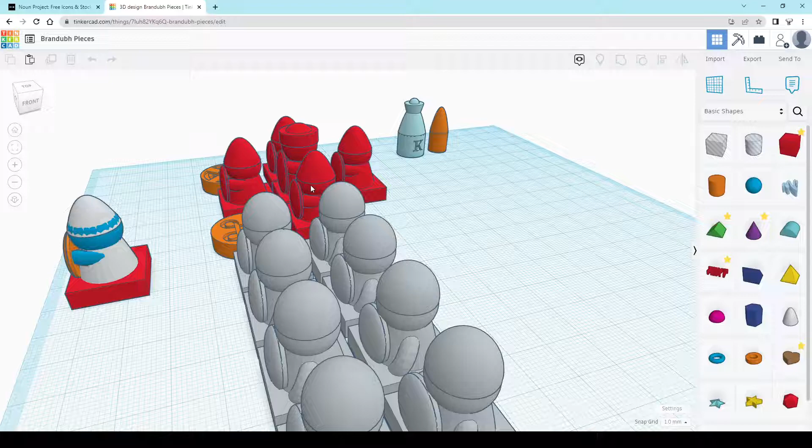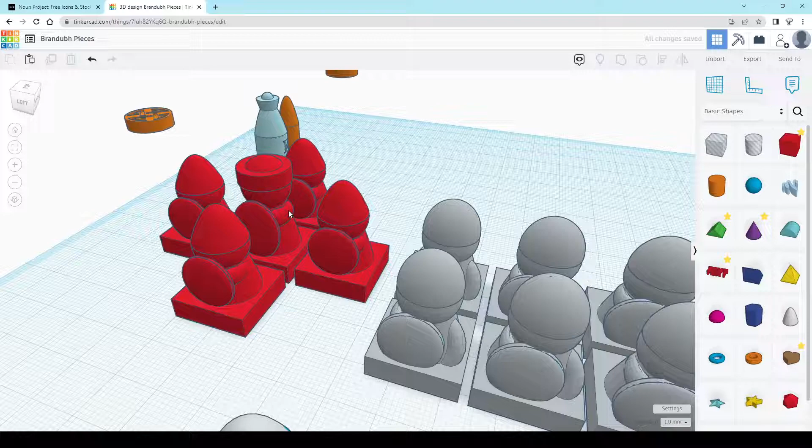As you can see, I've already made some pieces earlier. There are two teams: the attackers, 8 of them, and 4 defenders plus a king. These are my two teams. The king has a crown, and I've made the attackers and defenders have slightly different shaped helmets to differentiate them. I'm going to show you how to make one of these character pieces first, then the simpler flat pieces later.

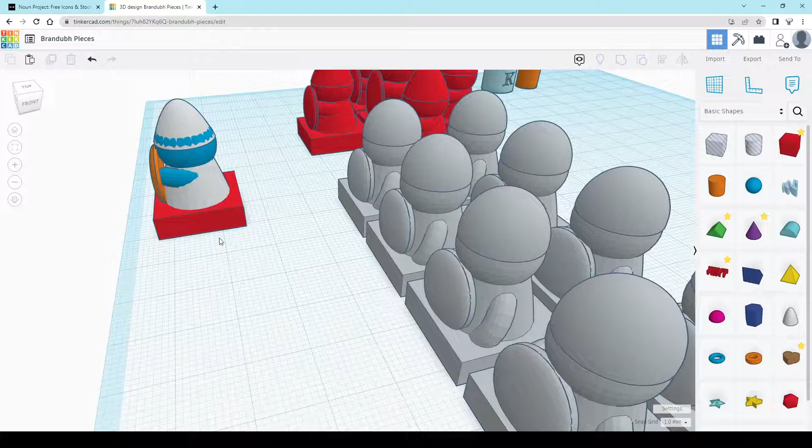So down here I have one that I've put into its constituent parts. Basically you've got a base, a sort of plinth, which is made from a cube.

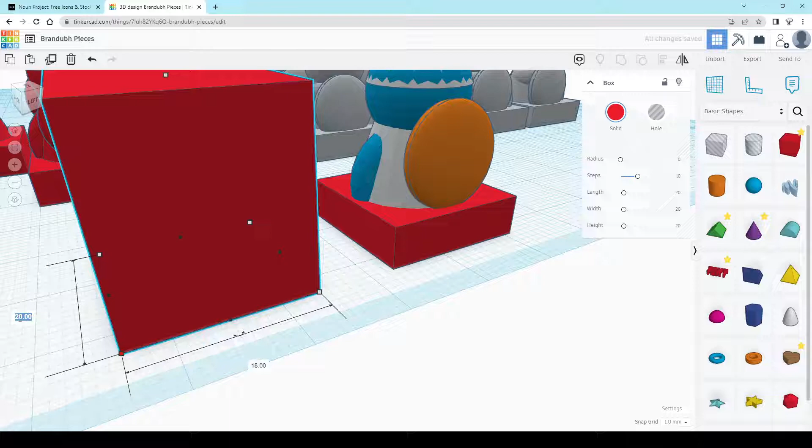Let's make another one next to it. I'm selecting cube. Depending on the size of your board, you can make the pieces however big you want, but the board I've been using for this latest project has 20 millimeter squares, so I've gone for 18 millimeters for the total width and length. 19 would be fine, as would a smaller piece.

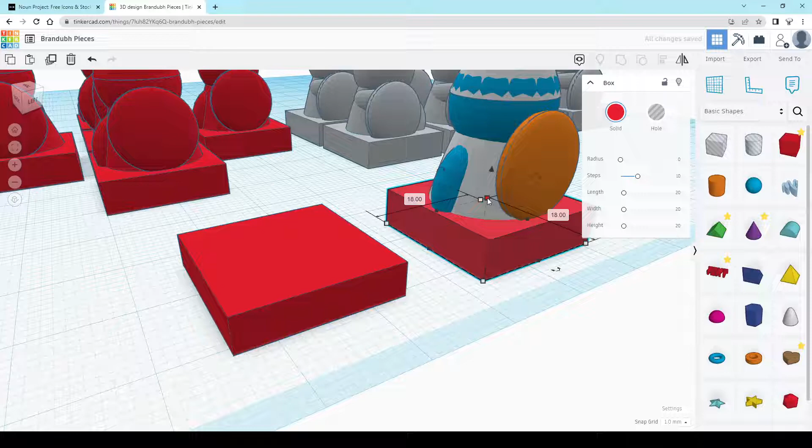For height, you can do whatever you want. I'm going to go for about 4 millimeters, although actually it looks like on this one it's 5, but it doesn't really matter. So that's step 1 - I resized it using this button here.

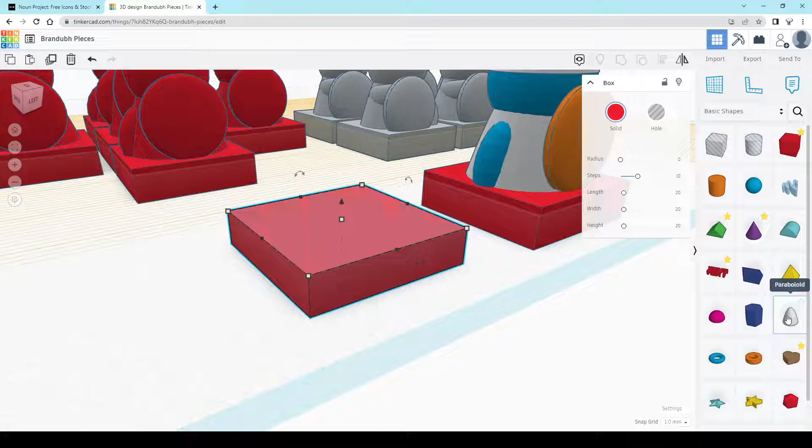Now I'm going to put on the body of the character. I'll click on the work plane tool and add it to this top surface, since that's the surface I'm working on. The shape I used was down here, called the paraboloid, so I'm going to click that. Because I put the work plane on top of the piece, it's already in position.

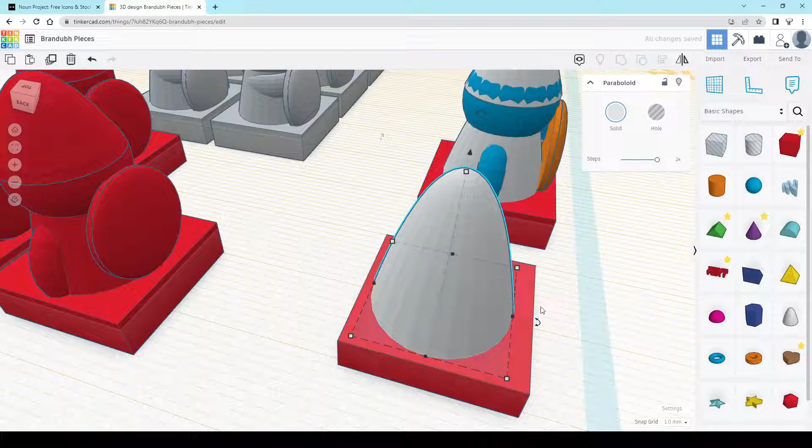I'm holding down Shift and Alt at the same time to resize, and I'm going to center that - although it already looks quite centered. In fact, I might make it slightly thinner on both sides, because I've got to fit a shield on one of the sides here. So it's not going to be exactly the same as my other one, because it doesn't need to be. I'm just going to align it on this axis, but not the side one.

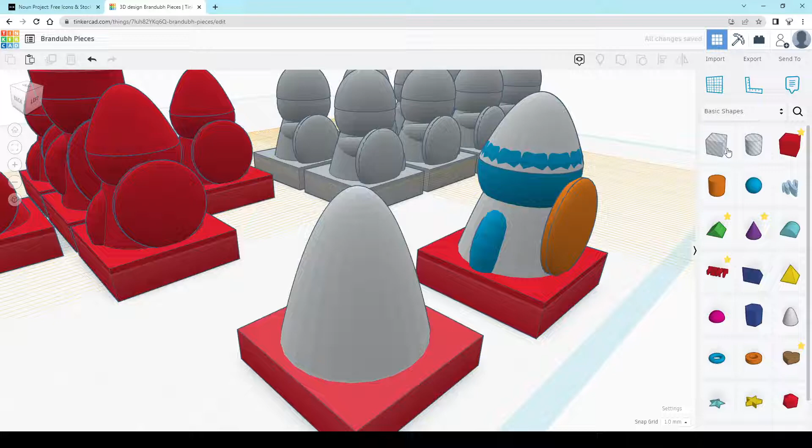Second step is to put on the head. I'm not going to put the work plane here, because it goes all weird angles. So I'll just put the work plane on top of the piece, like the base, like we did last time, and then make the head a suitable size. You can do this by eye really.

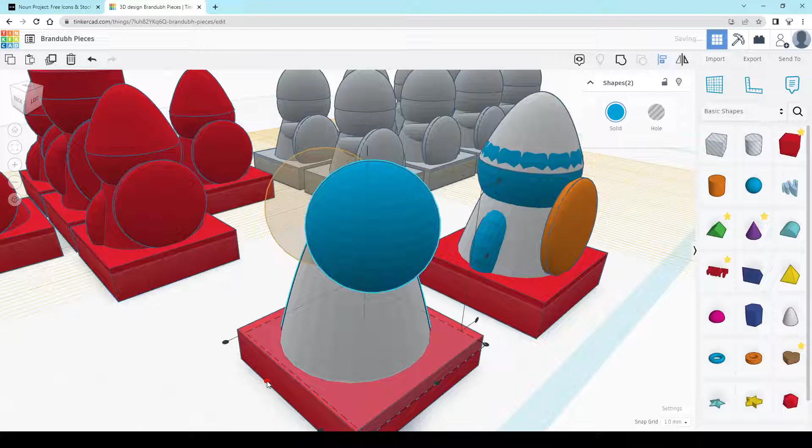Click on the cone to raise it up, and I might center that on the body. So with the head selected, hold down Shift, select the body, press align - and I don't want the body to move, so I click on the body, which narrows down the alignment options for the head. That aligns it in that axis, that aligns it in that axis, and now it's nicely in the middle. It's a bit taller than my other one, that's fine. You can fiddle around and make it the size you want, but I'm happy with that.

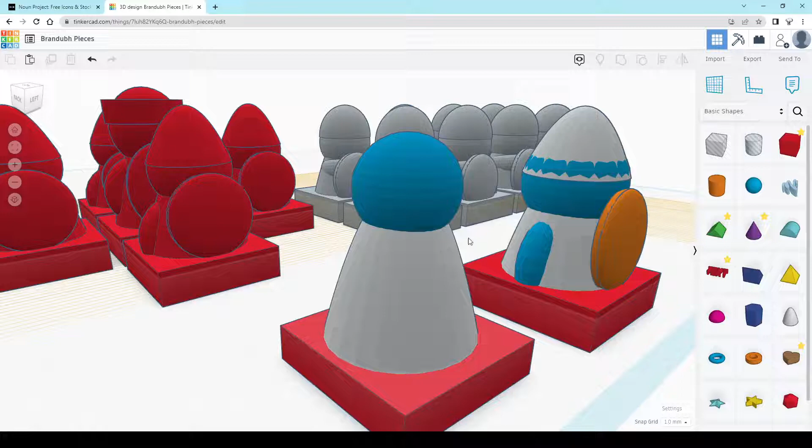Now it's time - you can do it in whatever order you want - but I'm going to do a helmet. I actually slightly prefer the dome helmets; these ones look a bit eggy. So let's do pretty much the same as we did with the head. The work plane is still on that base, so I'll leave it there. Choose the dome, and I'm going to try and match it pretty much with the size of this, which is 10 by 10 at the moment.

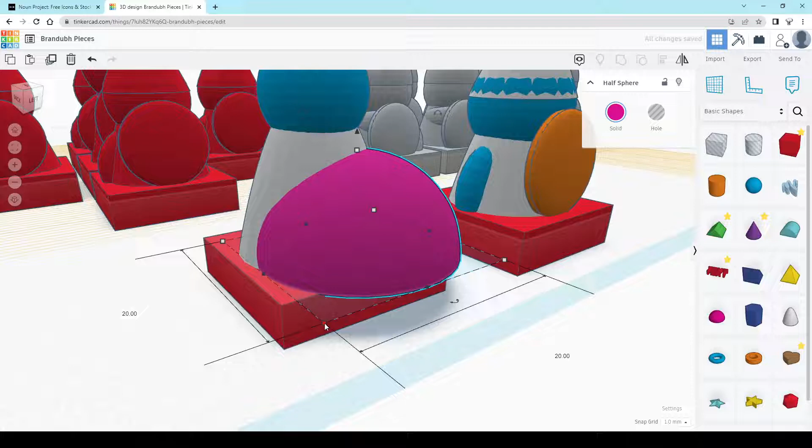So let's resize this dome to be 10 by 10, of course 10 millimeters being 1 centimeter. There it is, and we're going to raise it up to get it in a suitable position.

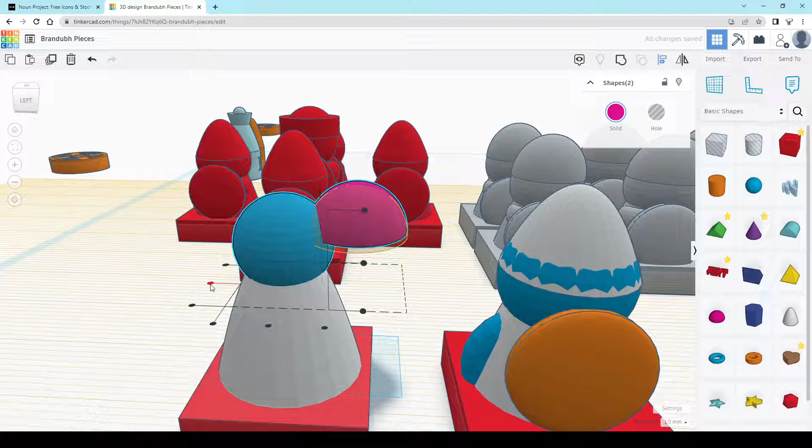I'm using the cone again, and I'm going to align that with the head. I'll hold down Shift to select the head as well for the align tool. I don't want the head to move though, so I'll click on the head, which narrows down the options. Oh look at that, that was a good guess.

That's almost exactly right. Now I'm going to make the helmet dome a little bit more pointy so it looks more like a helmet. That's pretty good. You don't want a large overhang here, no more than 1 millimeter, because you'll start to have problems with the printer.

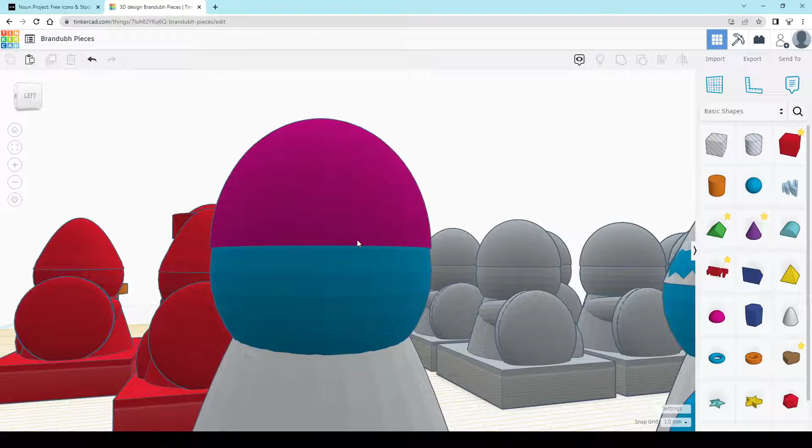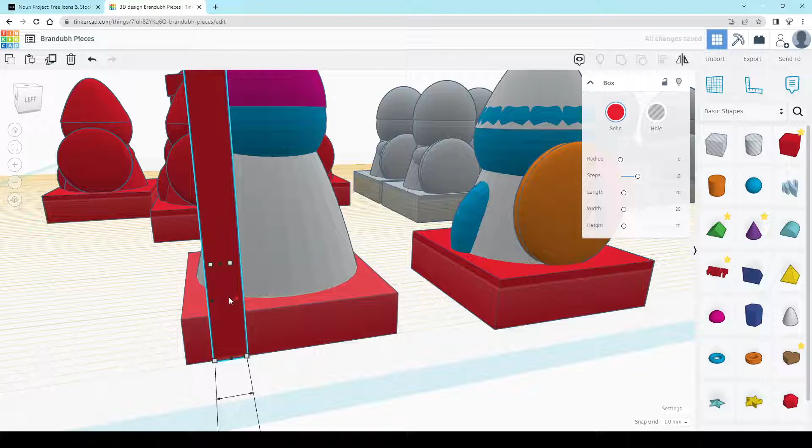Some of my pupils made these little bits coming down, so I'll show you a little bit - I guess you call them nose protectors. They did something like this, and it looked really effective, so I'm going to show you how to do it here. Let's narrow that down to a more sensible size, just a little piece like this.

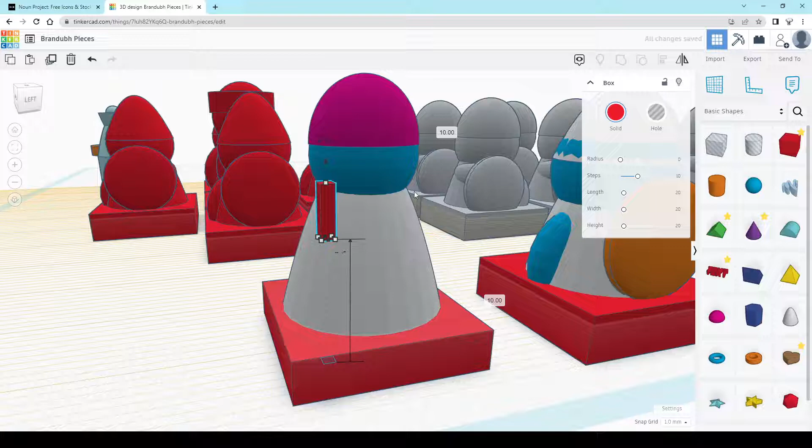I might put the work plane on this side actually, on the side of the plinth, which makes it a bit more intuitive to work with. I'm going to use the keys, and then the cone - can't tell, but it is actually the cone there. Going to push it forward. It needs to come up a bit, doesn't it? I'm using the arrow keys on the keyboard to do it.

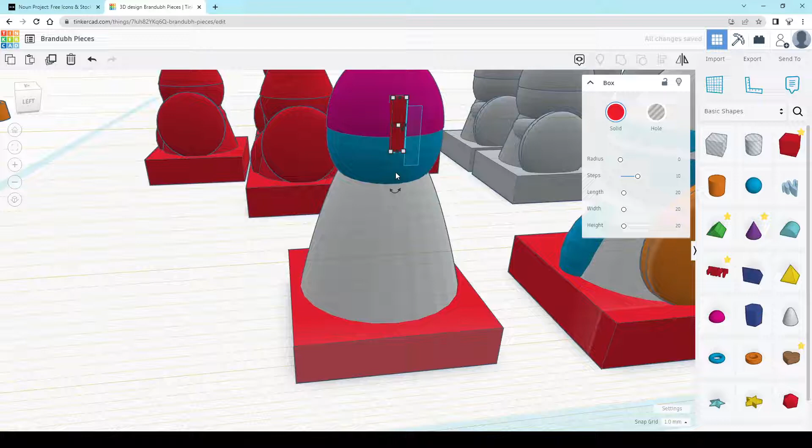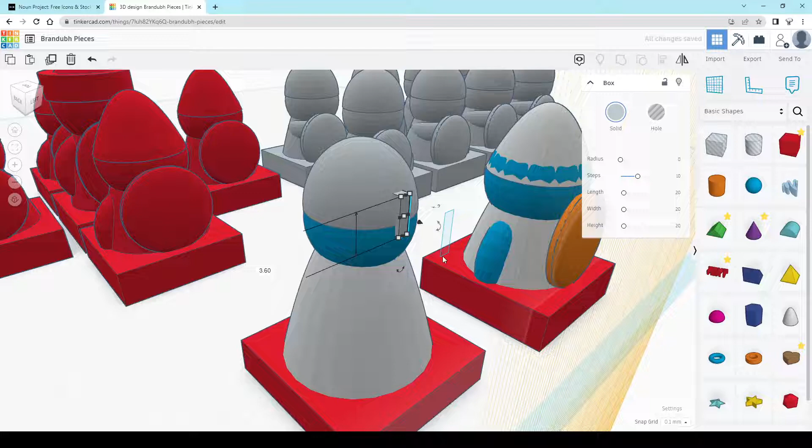Then we can push that in a little bit more. Can you see it's snapping? It's moving in quite far there, so I'm going to change the snap grid to 0.1 millimeters to make it a bit more precise. Then I might make it a bit shorter, and you could actually rotate it slightly on this axis, so it looks like this. Yeah, definitely, I like that. It kind of looks pretty authentic.

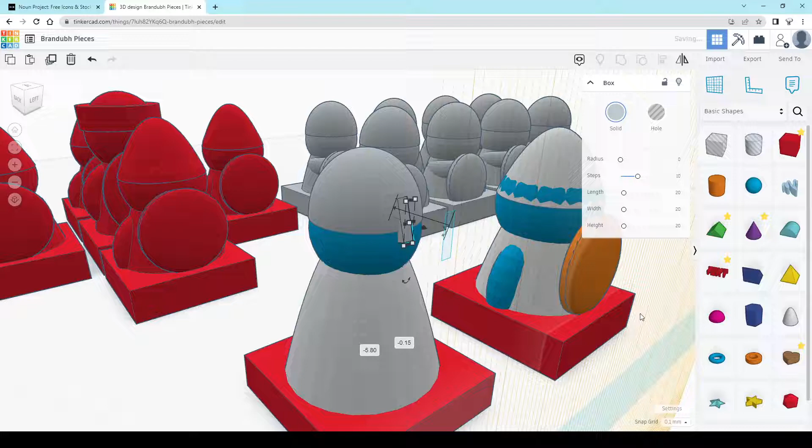So that's a chin guard - or no, chin guard? What am I talking about - nose guard, for my Viking defender. That was that. You don't have to do that obviously, that's just a little optional extra.

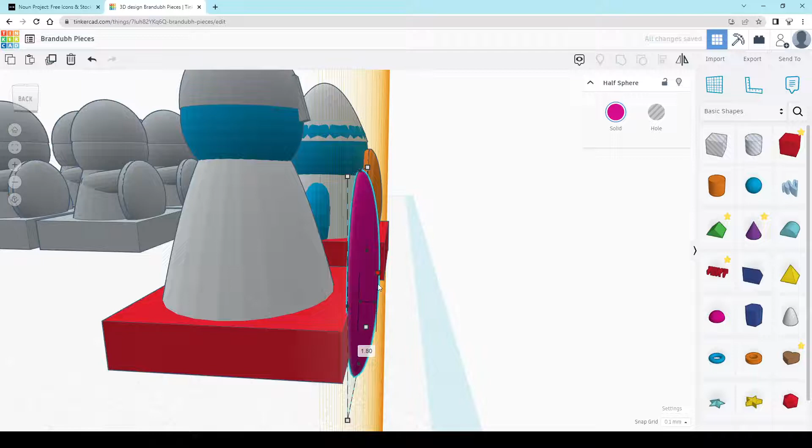Now we're going to do the shield, which you'll be pleased to know is quite simple. It's just that dome again, and we'll flatten it. Not too thin - we don't want it to be paper thin, because then it won't print, bearing in mind these are really small pieces. I think it needs to be a little bit smaller than that, so I'm going to hold down shift as I resize it to keep it in proportion.

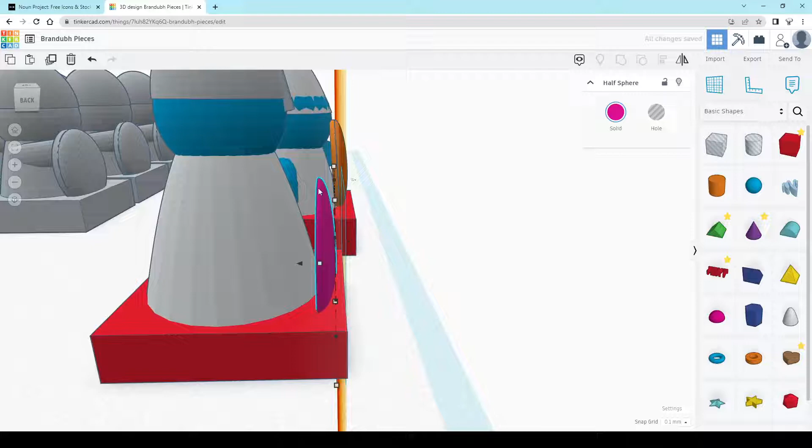Let's push this in here. Now we want to avoid it being floating in midair, so just - well, that's a bit still too big isn't it? Vikings tended to use round shields I believe, so that's what I'm going to stick with here. I'm going to keep it as authentic as possible, like that.

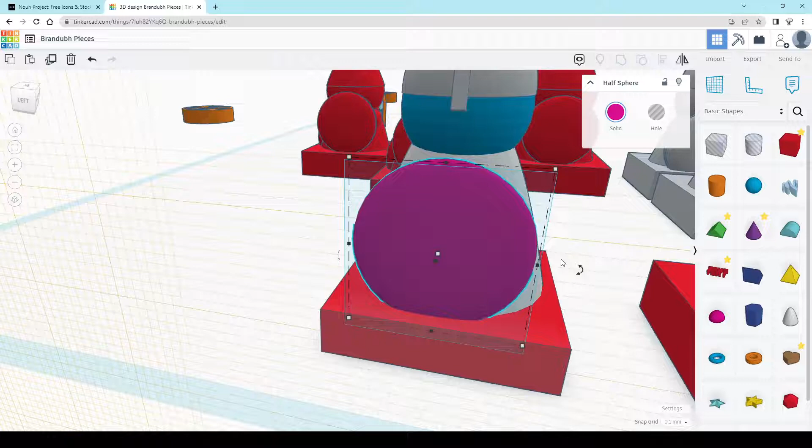And we could centre it, but actually it doesn't have to be centred. It might look kind of more artistic if it's slightly off to one side, because in reality Vikings wouldn't be completely dead in the middle with the shield - that's pretty good.

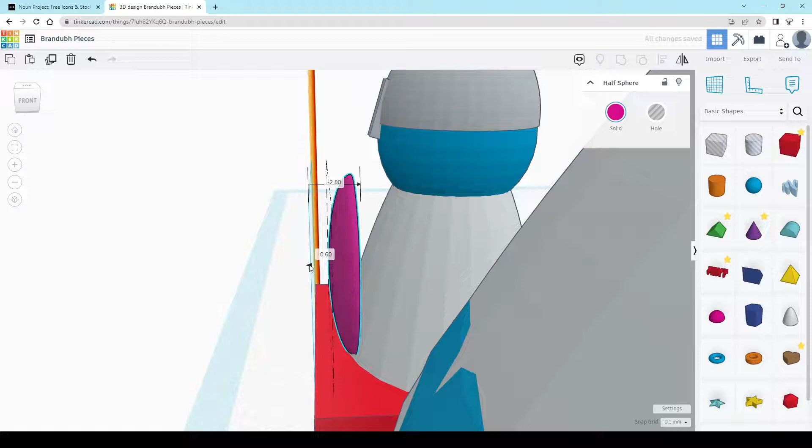Let's check the thickness of that. Okay, so that's still a bit thin for my liking. It might look realistic, but for the purposes we want it to be nice and strong, and there needs to be good contact between that and the rest of the model. So yeah, that's better, I'm happy with that - we certainly don't want it floating in midair.

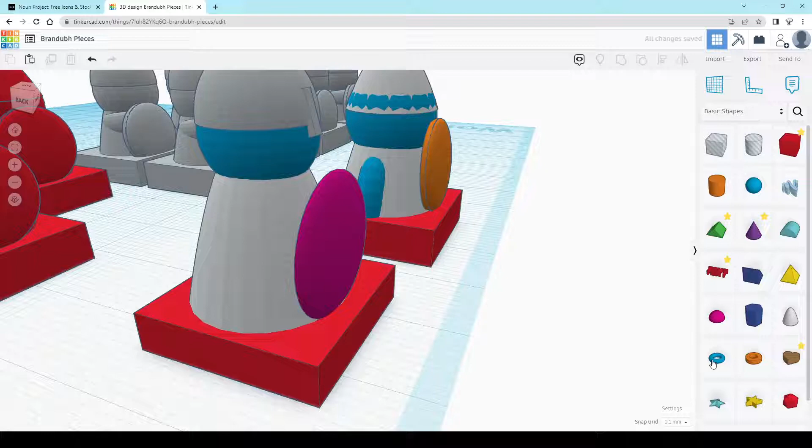And then I'm going to do the arms. I might put the work plane back to normal for now. For the arms, I just used a shape called a torus, which is this one here, and you have to do some bits of flipping on it first of all. So first thing, I'm going to flip it so it's upright using the flip tool, and then we need to shrink it - I'm going to hold down shift and shrink it to get it roughly the right size.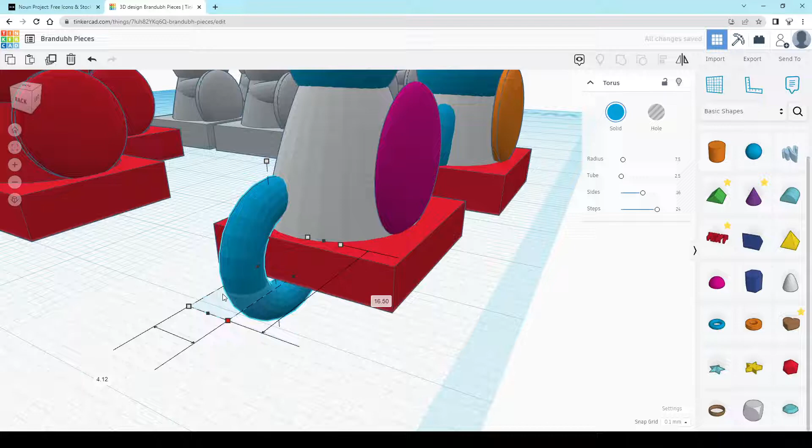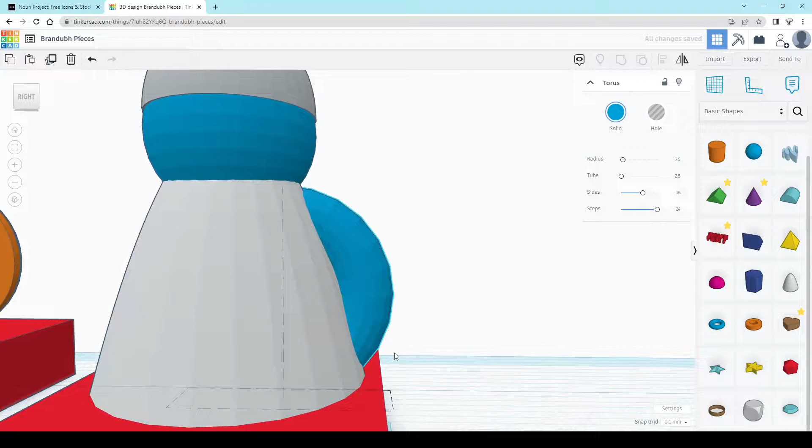And then I'm going to position it so that it looks like an arm. Looks a bit more like a teapot handle there, so that's not quite right. I'm actually using the keys to do this. Oh, that's pretty good, I quite like that actually - that looks quite authentic. Bit of a relaxed sort of looking arm, but it's fine.

Now, I've got to bear in mind that the squares on my board are 25mm, so it could stick out a tiny bit, but let's just, to be extra safe, push it so it's pretty much in line.

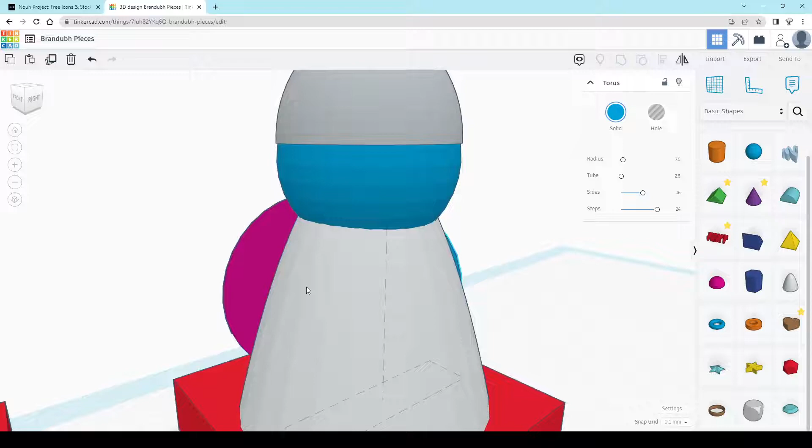I'm not sure if in real life they would hold the shield with the left hand if they were right-handed, since their right hand would be wielding a sword. I'm not going to do a sword on this character, so let's just have the left hand wielding the shield.

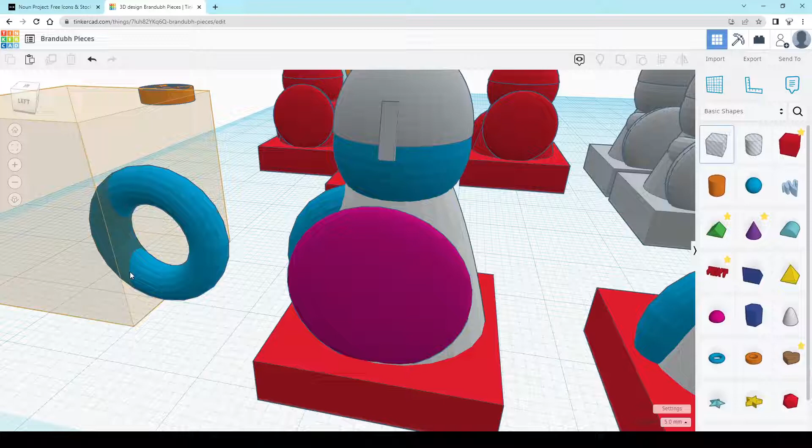Now, what I did for the left hand was use the same torus, but it's probably easier if I show you a bit over this way. I cut some of it off, so I basically got a cube hole and did something like this.

If I move it, it's on the 5mm snap grid, which will work. Let's turn that back to 1. Something like that. Okay, yeah.

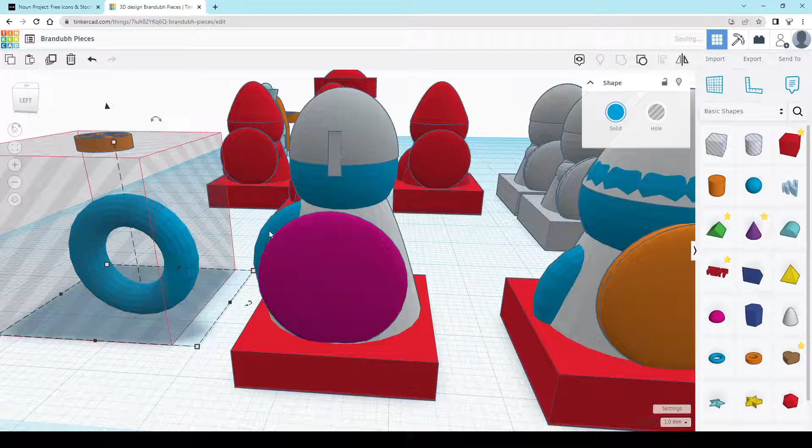Now I'm going to group that together, those two pieces, combining the hole and the torus to make an arm type shape. I'm going to move that over through the body, and then I rotated it using this, rotating it to be precise, doing it from above.

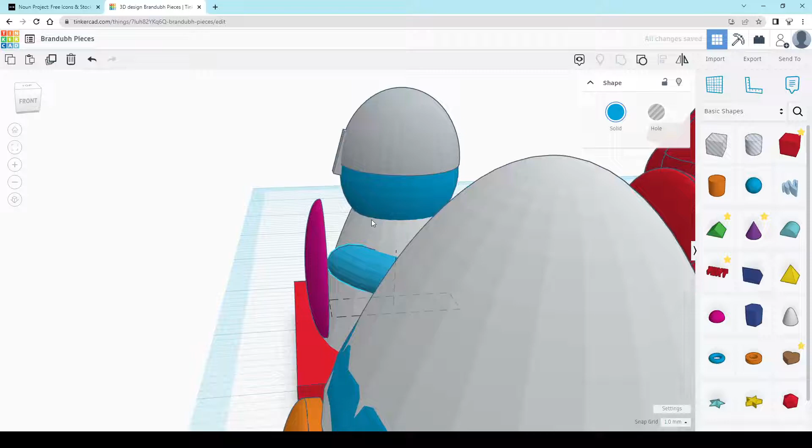Now what I did, I put it going up at a bit of an angle just to make doubly sure it would print correctly. Technically this is an overhang, but because these pieces are so small, it will manage it. Just tipping it up slightly like this makes it print a bit better.

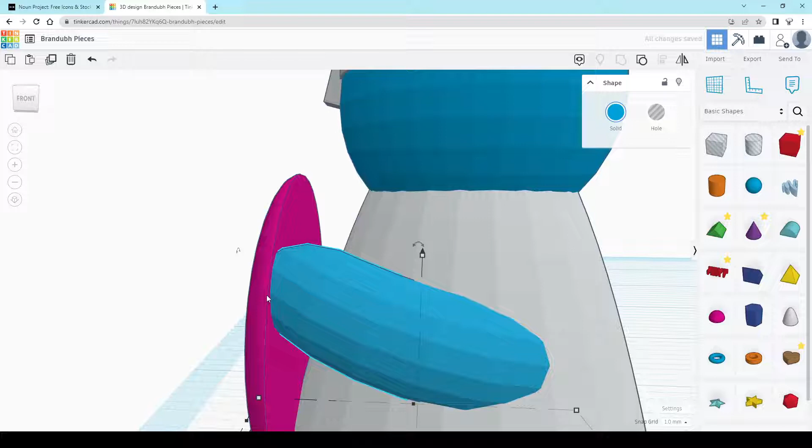Also, you don't want the hand sticking through the shield. And having the arm going into the shield is going to strengthen that shield and make it less likely to snap off. It gives it a bit more strength.

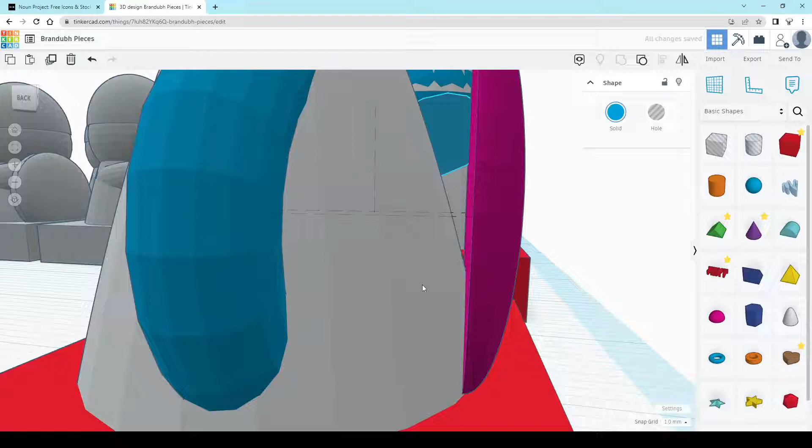So yeah, I'm happy with that. Let's check the height comparison. That arm shoulder does start a bit higher, so we could raise this a little bit. Not too high, obviously. In reality, I think the shield straps would be a bit lower down, but it doesn't really matter. We could move that in a tiny bit more.

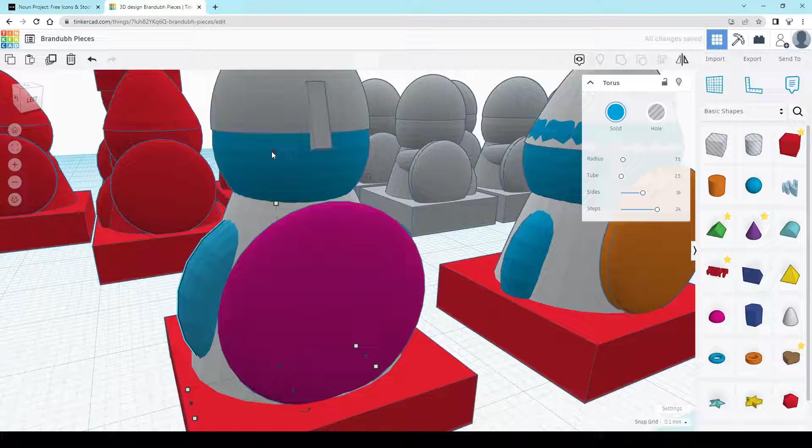And maybe down a touch. I don't want it poking out the other side though. Just to get it matching a little bit on the other one. Yeah, you can see there actually it's not going over this. No, I quite like that. I'm quite happy with that.

Good, and that is how you make one of the soldiers. I would join it all together now, group it, and do it from above so I don't accidentally group some of the other pieces.

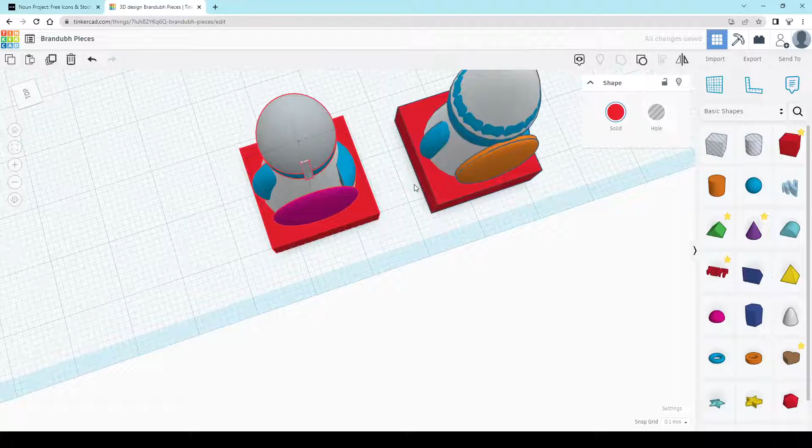And it's thinking about it. Tinkercad's been a bit slow today. I think there's lots of people using the program, so it takes a while to group together. There we go, that is done.

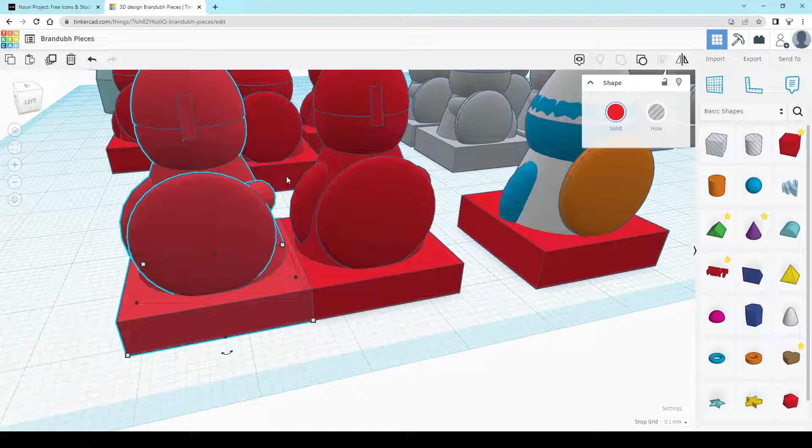Now, obviously, if that was your King's team, you would duplicate another 3 of them, and to turn them into the other soldiers on the other side, you can either just print them in different colours, or what I would do is slightly customise them. So maybe change the heights slightly, maybe make one of them a bit thinner. You could actually give the attacking ones a spear, but it would have to be quite thick.

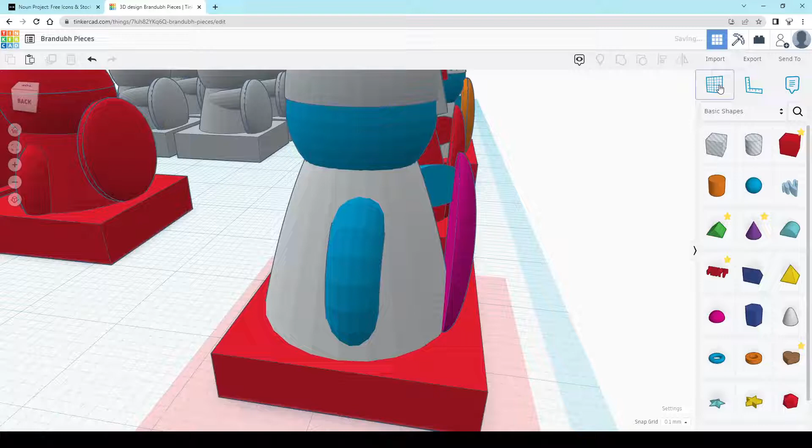So if I was going to add a spear, I would use a cube again. There's not a cube I can recycle, so I'm just going to have to get a new one. It's far too big, so I'll just make it quite chunky, and I'll have it just literally next to the body.

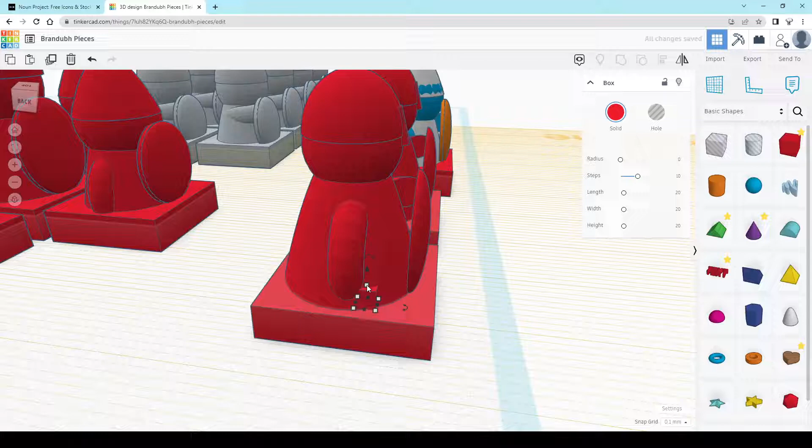2mm, let's see how that looks. Gonna bring that up. Yeah, that's not too bad. It's thicker than obviously it would be in real life, but we want this to be fairly sturdy.

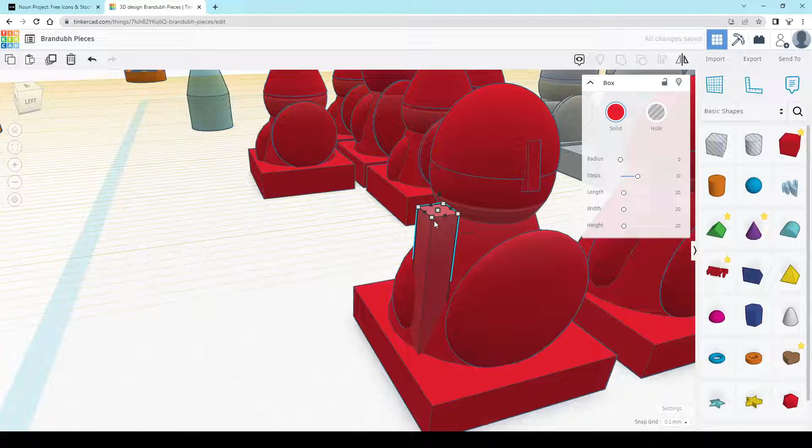And to put the tip on the spear, I would use this roof pattern. So I'm actually going to put the work plane on top of the spear, because that's the thing I'm working on. Let's look at the dimensions, so it's 2.2 by 2.2.

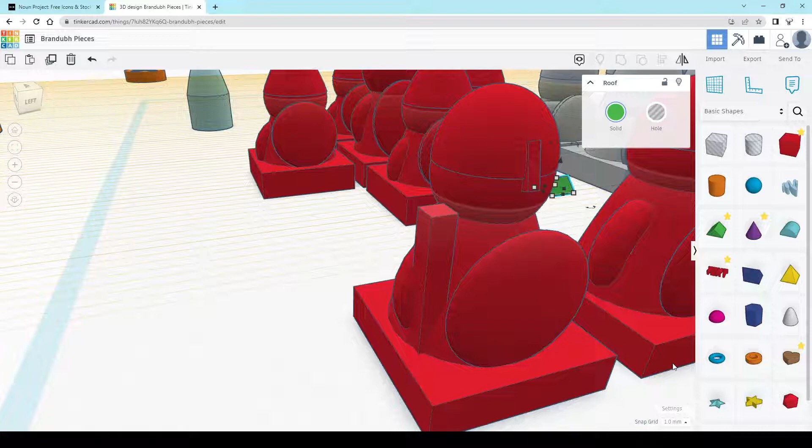So we're going to make our roof shape the same. If I hold down shift when I do this, it should let me do 2.2 both at the same time. Oh, is he gone? Miles away. Let's put the snap grid up to 1mm, using the keys here. I do use the keys quite a lot. Okay, I'm going to make it a bit more pointy.

That's looking pretty good, I like that. I'm going to just align it. Is that 2.2? That's 2.2. Let's align it, so select those two things. That's selected, hold down shift, select sphere, align - don't want the spear to move so I click on that. Align there, align there. Job's done.

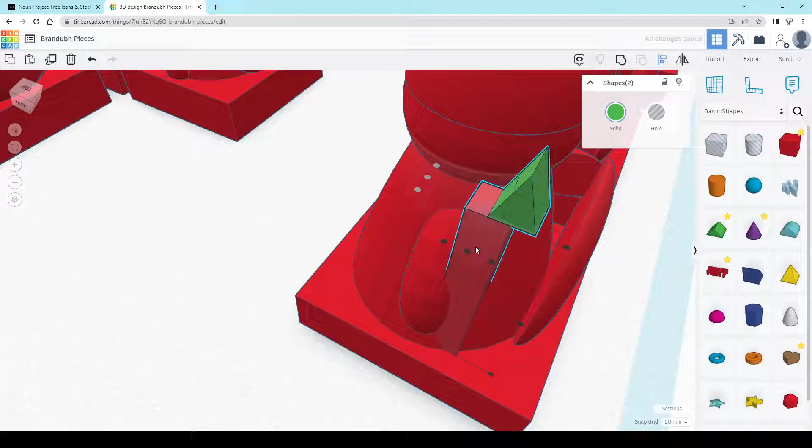You can combine those two together like that, and you've got a spear. And then obviously you combine that with the shape as well. So yeah, nice chunky spear there.

You could probably get away with it being a tiny bit thinner, but that's fine for now. So that's what you do.

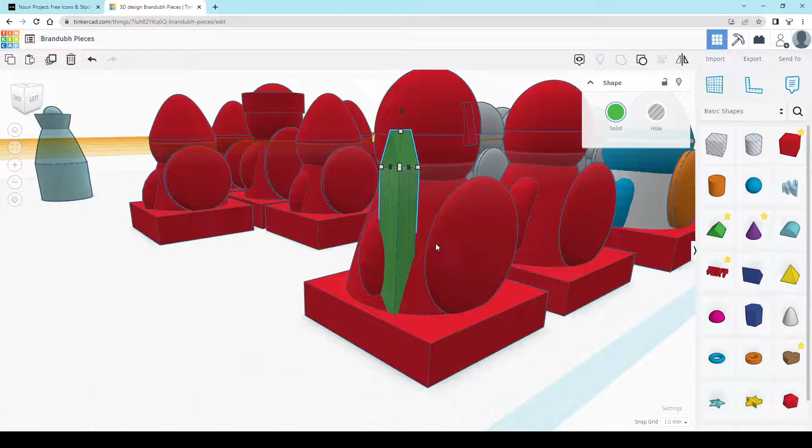And then for the king, I would just put - you could make it a bit taller and put on a crown. So let's duplicate it again. You can see how often I just duplicate things. You really want to make this as easy as possible. And I would ungroup it.

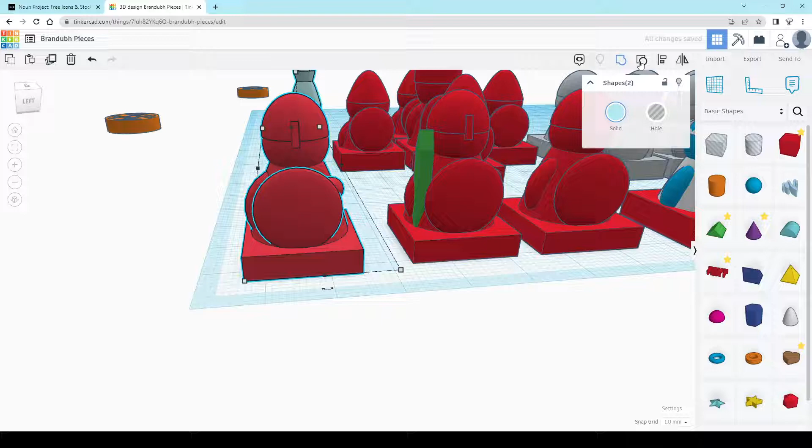We want it to be really obvious who your king is, so we're going to make him a bit taller. Let's ungroup all of that. Let's put the work plane back to normal. Ungroup it, and we're going to give him a crown instead of a helmet.

And we're going to change the shape of the shield slightly. In reality, he probably would have had a circle shaped shield.

Let's put a crown. Let's make - move the head up a bit. Because back in the olden days, kings really would have been the strongest warriors. It wasn't - well, I meant to actually enlarge that, so let's put it up. If you weren't a strong warrior, physically strong fighter, you wouldn't be a king in the Viking Age.

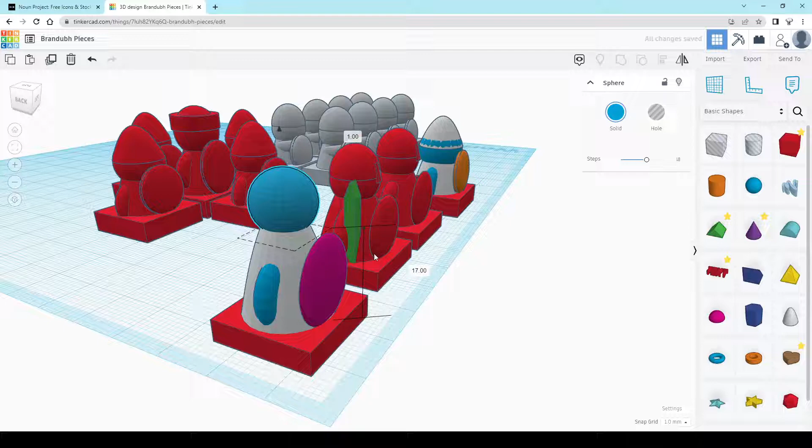It's quite often, if another person wanted to take your throne, they would challenge you to a fight, and you'd have to do it, or you would lose your position. So there's my king.

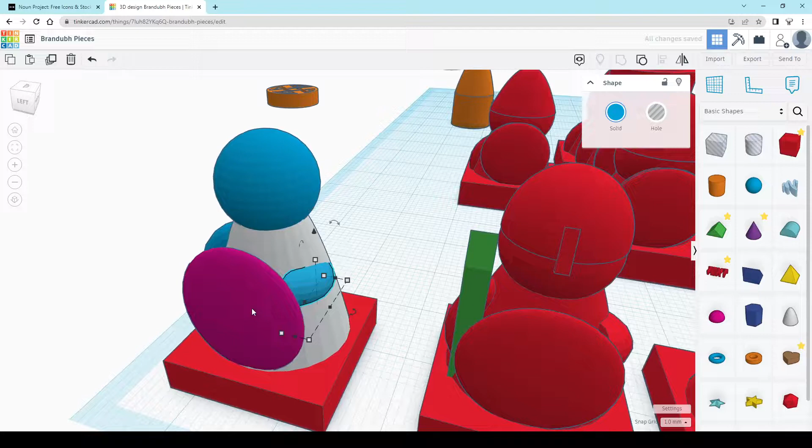I'm just going to move the shield over a little bit, like that. And let's put a crown on his head - could be a queen as well if you wanted. Let's put work plane there, and I'm going to use a ring.

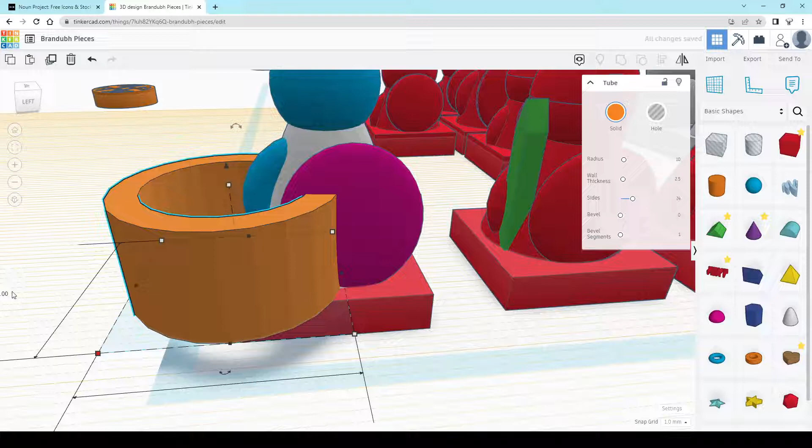The head was 10, wasn't it? So I reckon if we go for 11, because we could get away with a 1mm sort of overhang quite easily. Let's use this, I'm going to align that with the head.

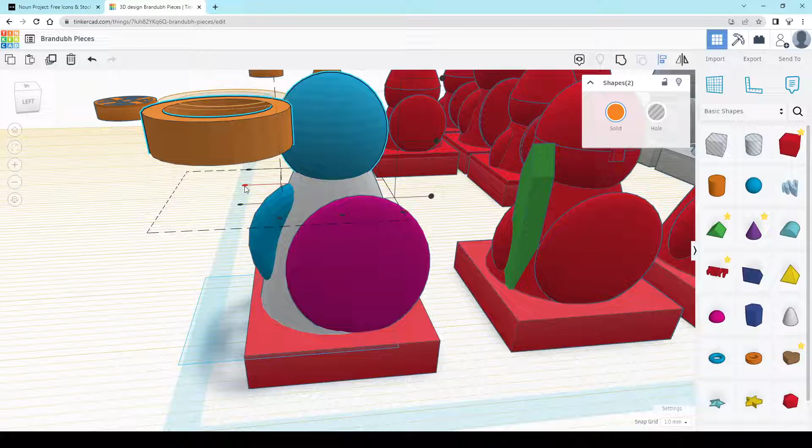So shift, select, align, click on the head because you don't want the head to move, and we can preview it. I'm doing it - I've done that correctly. Yep, there and there, not a bad guess. Something's a bit squiffy here though, isn't it?

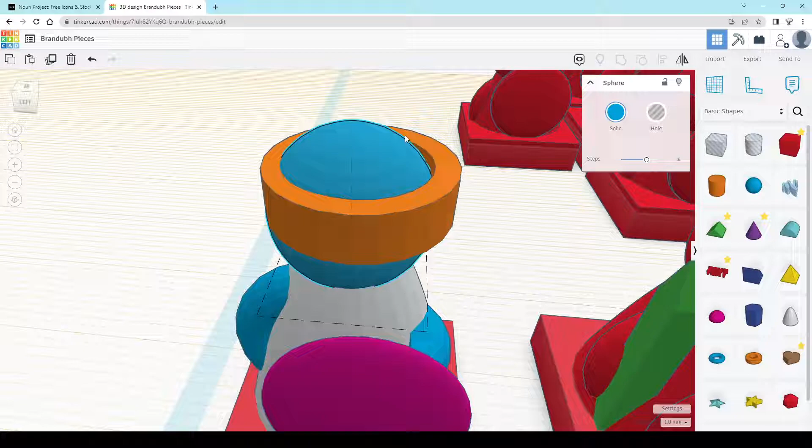What's going on with the size? 11 by 11, the head is 10 by 10. Why is that slightly - seems to be not quite centered. Not quite sure why that is. Let's figure it out.

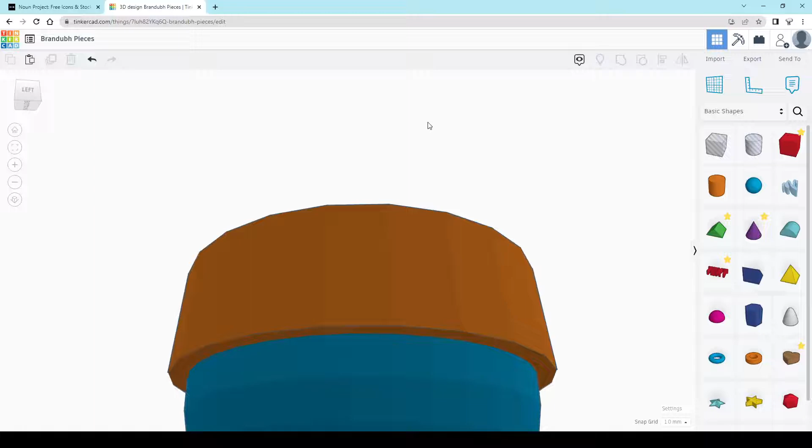Okay, let's try again. So let's align it just to the head, click on the head. Oh, maybe I just didn't click on it correctly. Okay, now we need to make sure it's attached and not floating in midair. Nope, that's good, and I reckon that will be fine.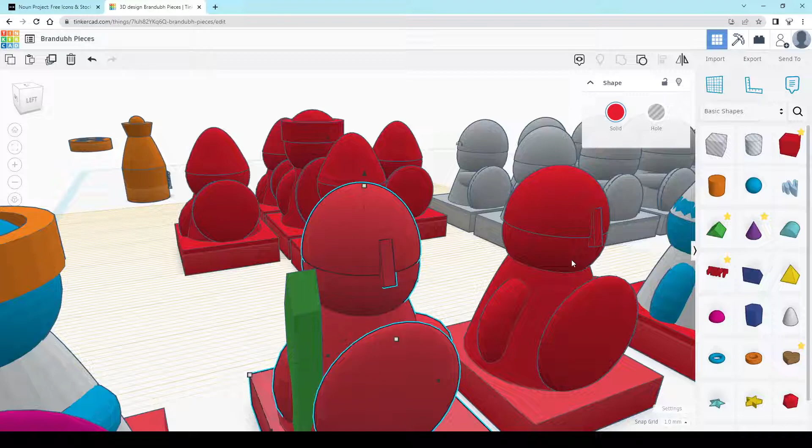There's a bit of his head poking out on top. One or two people I have seen do this - they have actually made a little upright bit here, like a metal thing, which you could do in a similar way to this. You could recycle one of these nose parts if you wanted, the nose guard. But for now, I'm happy with that.

It's pretty obvious that that's the king - it's taller, it's got the helmet. If you could raise the plinths as well, I suppose, would be another way of doing it.

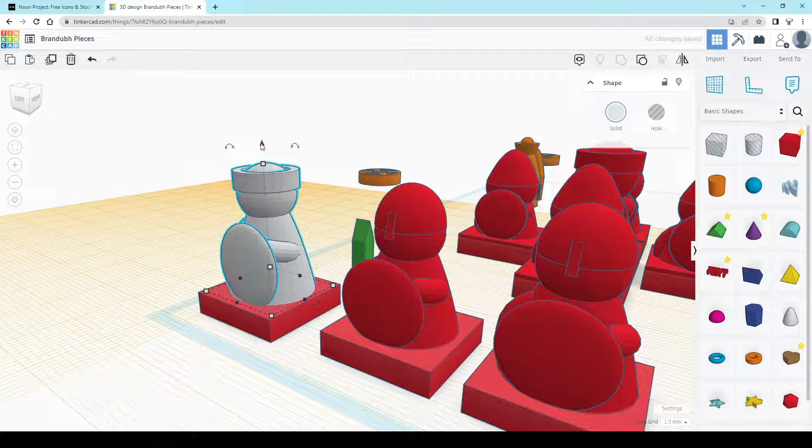I can show you how to do that now actually. So let's select all the parts except the base and group those together, and then we'll raise that up. Let's say maybe raise it another 2mm, and then let's raise the base 2mm just to make it really, really obvious who the king is.

It's much more important than the others. Shift, select, so they're both selected, group those together.

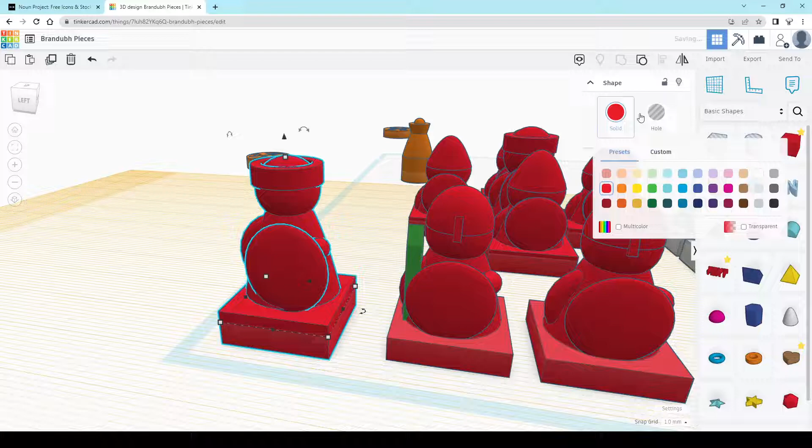What I have done is printed the king actually in different colours using different 3D printer filament, which looks quite nice. So I've used silver for the king, and then black for one team, and white for the other team - I think white for the king's team is what I had. So that's how you make the pieces.

I'm going to do a second tutorial to show you how to do the flat pieces, the flat plane pieces, but that concludes this tutorial on the Viking style Brandubh pieces.